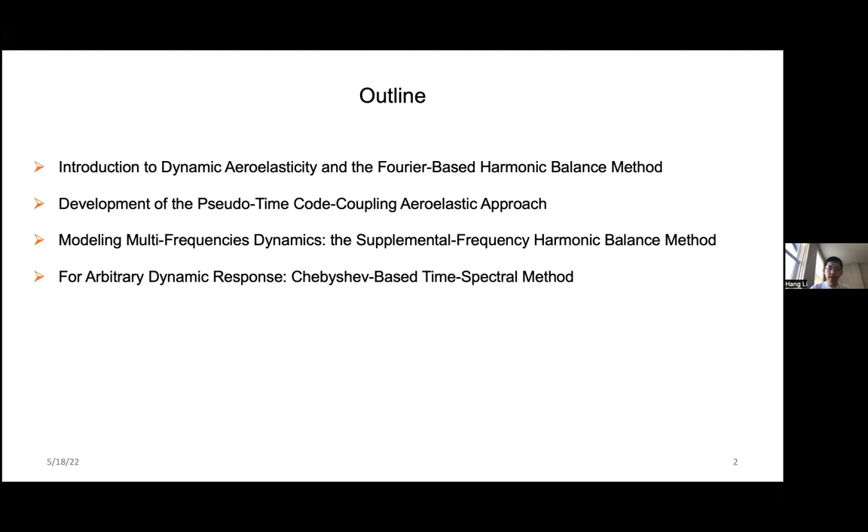So first, dynamic aeroelasticity. This is a multidisciplinary problem. It includes aerodynamic force, or in other fluid media we can call it just fluid forces, with structure elastic forces and inertial forces. This is the coupling of those three.

So for flutter, basically we have two basic phenomena. There are other phenomena, but these two are pretty common to this topic. One is called flutter. We usually define it as the onset point of self-excited vibration. So when we look at the figure here, there's a curve that defines the stability boundary. When we move from stable to unstable, at this boundary it starts vibrating, we call it the flutter point. Another term is limit cycle oscillation, LCO. Usually in literature it's defined as the vibration following the flutter point that has a finite amplitude. Usually these two terms are used interchangeably, but this is my preferred definition.

So from stability point B moving to C, the vibration has an obvious finite amplitude there, so we call it LCO. At the flutter boundary, we can model the system by linear methods, but for LCO, nonlinearities are important, and we need a better approach to model it.

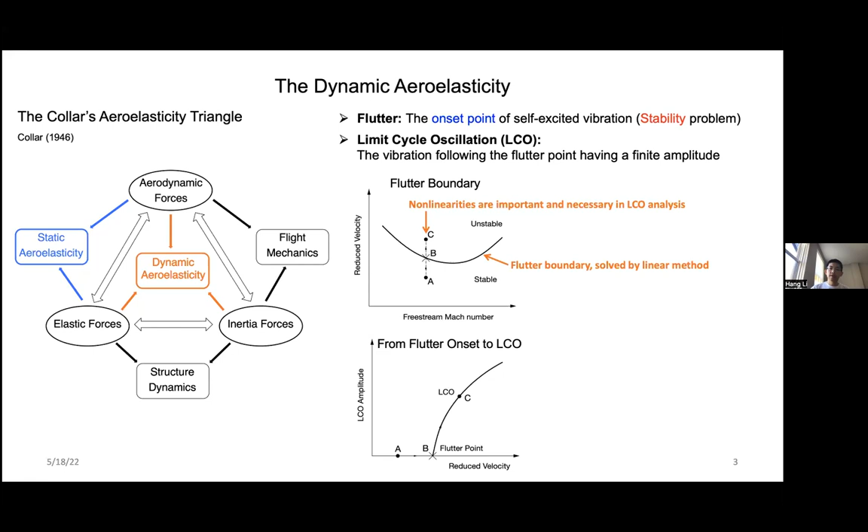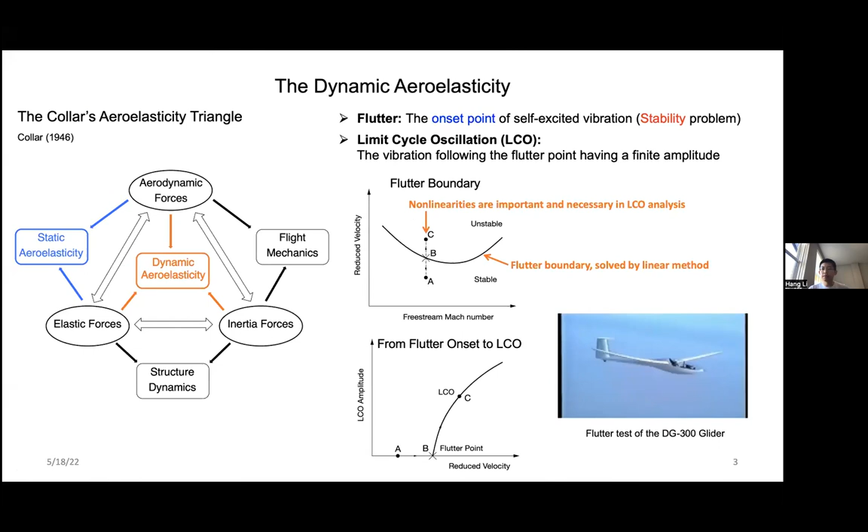Here's an example of the DG300 glider. This is a pretty popular video that shows the flutter onset. So it speeds up - I believe there's another airplane dragging it to speed up - and then after it slows down, the flutter stops.

Before I talk about my method, I want to discuss some traditional aeroelastic methods. Usually when I construct the problem into an aerodynamic part and a structure part, there are two equations. When we solve the two equations together, we find, for example, if we give an input, we find point A, or give another input, we may find point C here. So we gradually try different points, and finally we can bracket it and determine this flutter onset point. This method is based on trial and error, and we need multiple rounds of solving. For the fluid and structure parts, we need time synchronization, and a very small time step is required to resolve the problem.

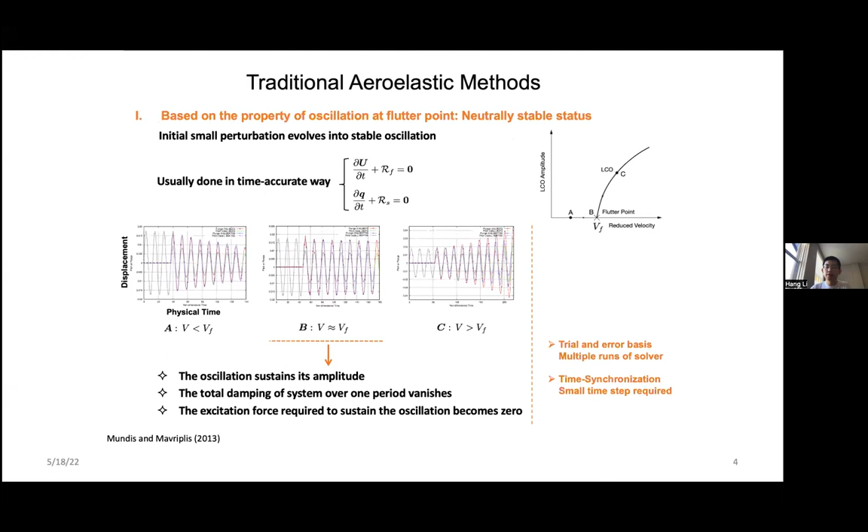Another traditional method is called the flutter determinant or eigenvalue method, treating it like an eigenvalue problem. So this is the structural equation converted into the frequency domain, and for the aerodynamic part, we convert it to another matrix vector multiplication, using this matrix we call the aerodynamic transfer matrix.

And then we need to determine this big matrix on the left-hand side, and the determinant must go to 0 for a valid solution of Q. That's how we can determine a flutter point.

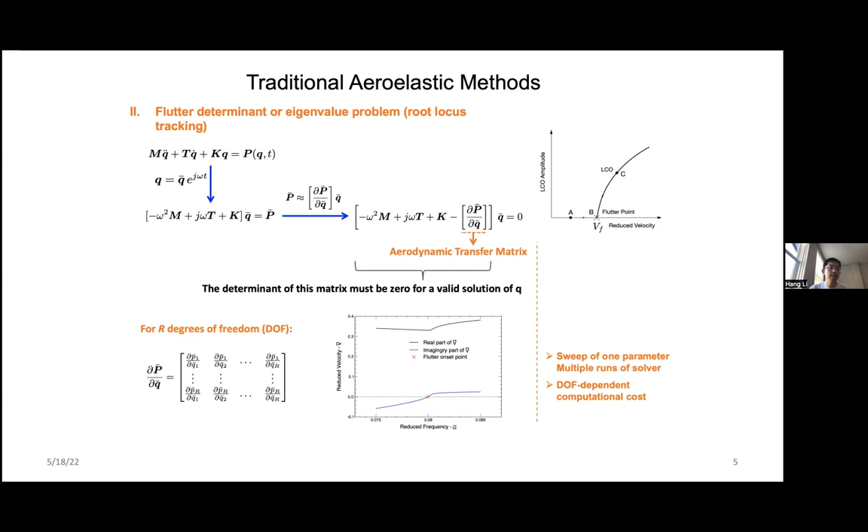Again, this method needs to sweep over one parameter, usually the frequencies, and we need multiple rounds of solver. This method really depends on the number of degrees of freedom. If we have more degrees of freedom, we need more rounds to solve the problem. The computational cost basically grows linearly with the number of degrees of freedom in your system.

So this leads to some questions about how we want to improve our approach, and this also leads to some points that we can improve towards the optimal aeroelastic method.

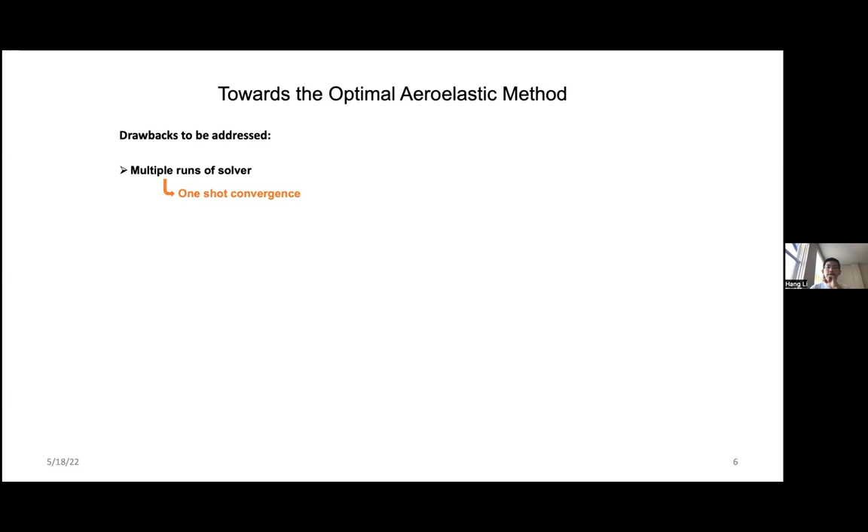First, the drawbacks to be addressed. First one is, if we don't need to run the solver multiple times, if we can solve the problem in one shot run to convergence, then we can save a lot of computational cost.

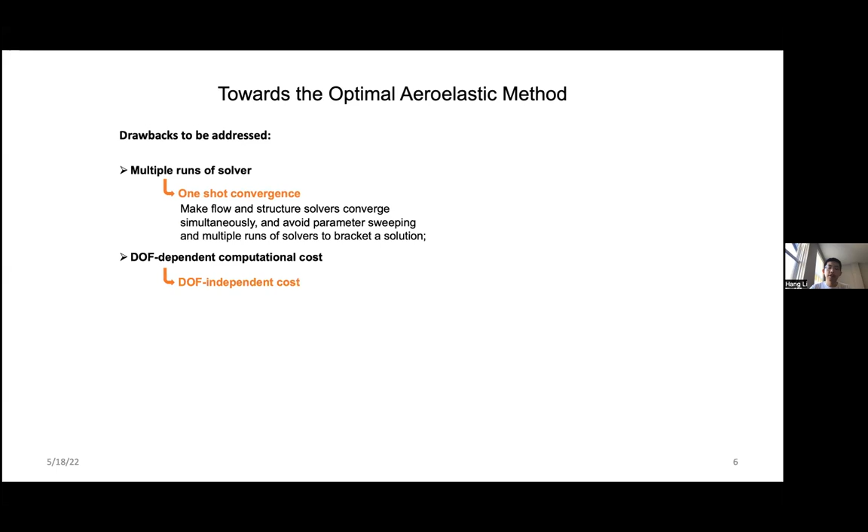And then if we can develop a method that is degree-of-freedom independent, then again it saves a lot of cost.

And then if we can desynchronize in physical time between the fluid and structure parts, we can have an optimal method for each field, and this could also potentially improve the efficiency a lot.

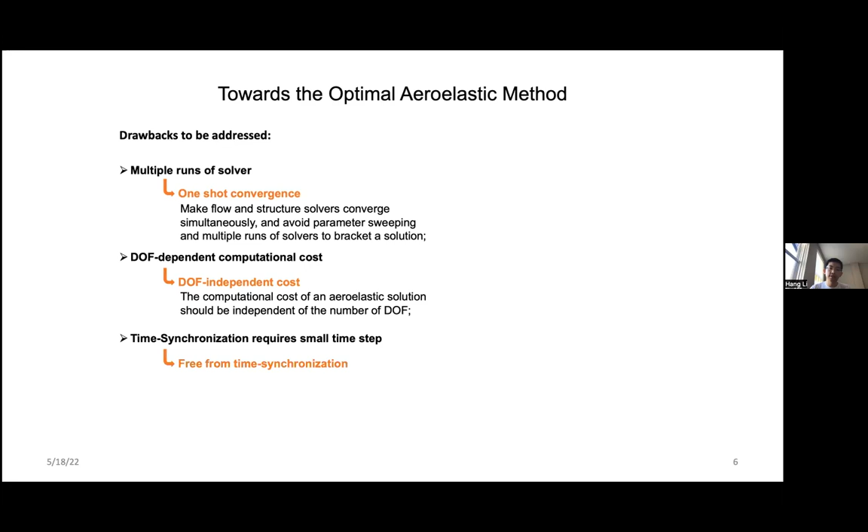Also, another point is that if we can solve the flutter and LCO (limit cycle oscillation) in one solver, it's going to be great.

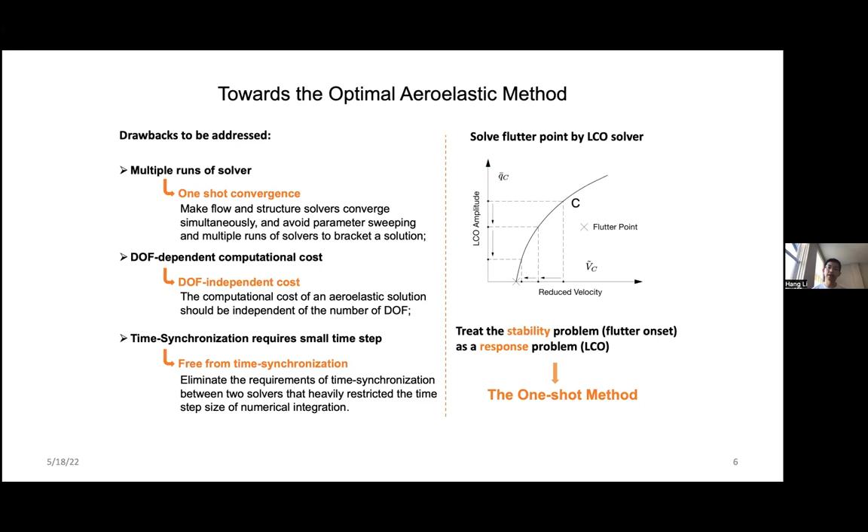In this way, I developed the one-shot method, based on a harmonic balance approach. So I will talk about how I can achieve all these goals.

The harmonic balance method is a Fourier-based mixed time-frequency domain method. So usually for a dynamic system we treat in our research, we frequently encounter periodic problems.

But when we do simulation of a periodic problem using a time-accurate method, we have to dampen out the initial transient. It could be long, and it could be costly.

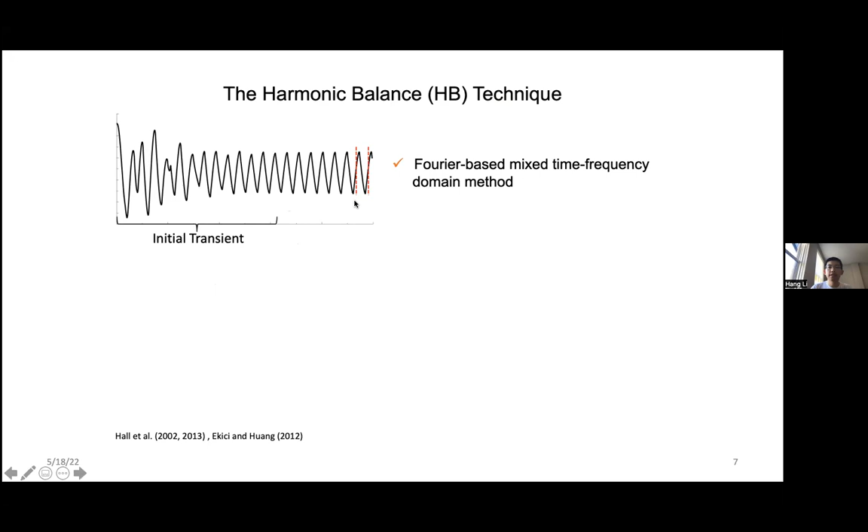So instead of going through all this transient and waiting for a periodic pattern to settle down, we can directly look at this periodic pattern. We don't actually go through time steps over the period; we just solve the solution at a finite handful of collocation points over a period, and finally resolve every point in between using Fourier interpolation. By doing this, we can save computational cost significantly.

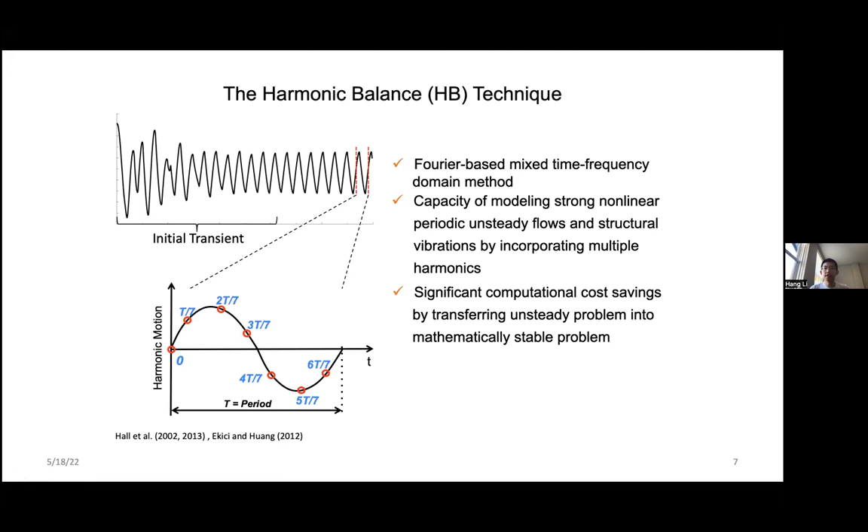This is inherently convenient for analyzing flutter and LCO problems, which are time periodic. This method can also easily model strongly nonlinear periodic problems by using more and more collocation points to resolve the pattern.

So this is an example applying the HBM technique to the aerodynamic equation. I'll take the RANS equation as the example. The uppercase U is the dependent variable vector, and we can convert it using discrete Fourier transformation into real and imaginary parts.

And we assume we need to retain the n number of harmonics. This leads to a transformation: U star is the collocation points over one period, and U hat means the Fourier coefficient. These two can be converted interchangeably using the Fourier inverse transformation and Fourier transformation.

And then we substitute this relationship into the governing equation. Finally, we get an equation at a number of subtime levels, and this time-derivative term, look at here.

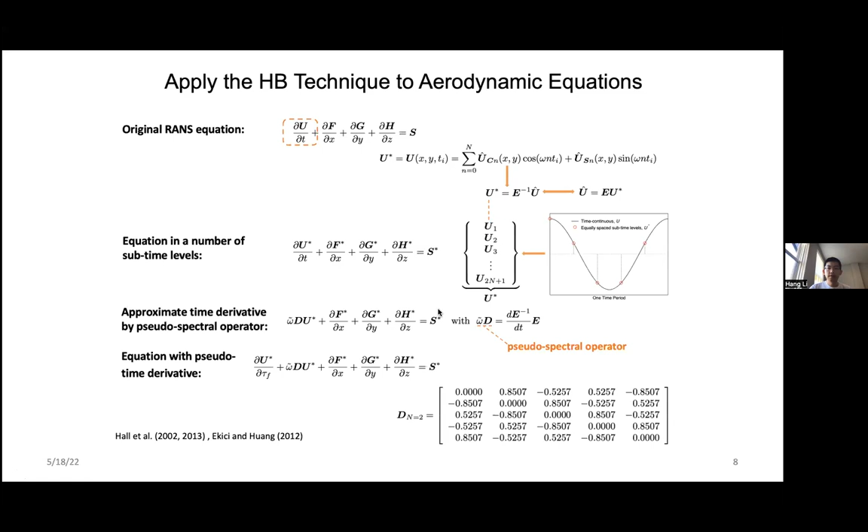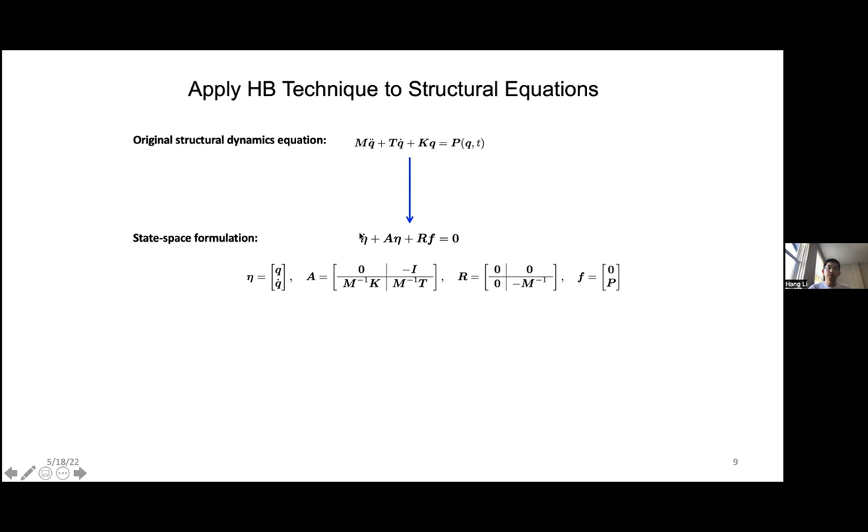Also, we can do the same thing for the structural equation. This is a general equation, and we convert it to state space formulation, doing the same thing: converting it into harmonic balance form with a pseudo-spectral operator, and then adding a pseudo-time derivative.

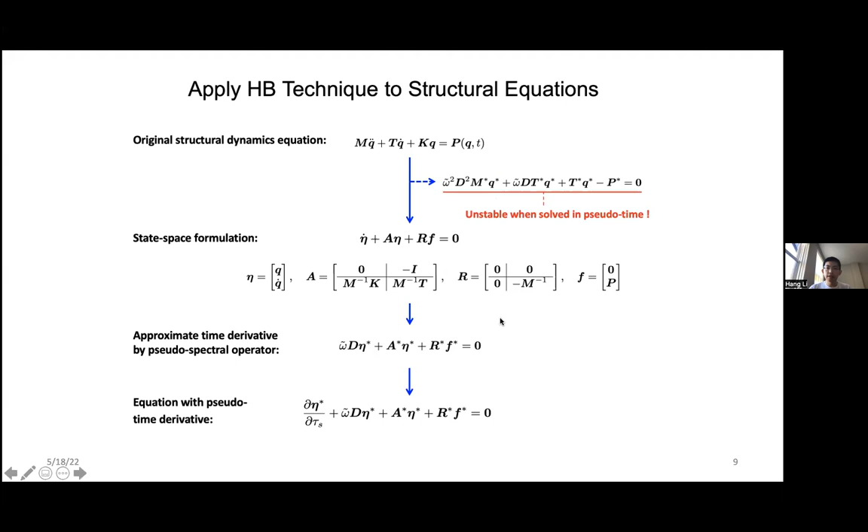One thing I want to mention is that we can actually go directly from the original second time-derivative equation into this form. We have a d-square omega-square term here, but this equation is not stable when solved in pseudo time. I have another method to stabilize this equation, but it's not in the main scope of this talk, so I will put a reference at the end. For now, we focus on this equation based on state space formulation.

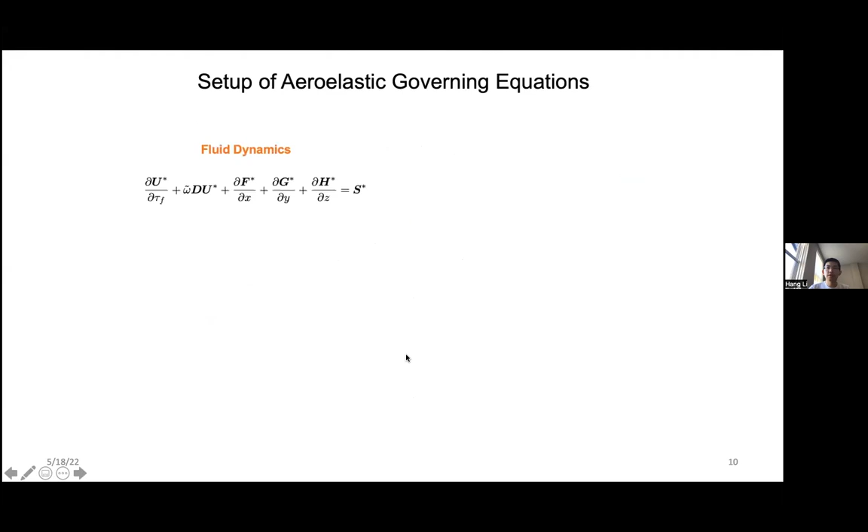So after this, we can set up an Aeroelastic governing equation. This is fluid dynamics, and this is structural dynamics. We rewrite it into a very brief form.

In fluid dynamics, for example, Mach number and Reynolds number are usually fixed parameters. In structure, the structure property matrix are fixed parameters too. So finally we can give a compact form like this, where everything inside these parentheses is a variable that needs to be solved for the aeroelastic problem.

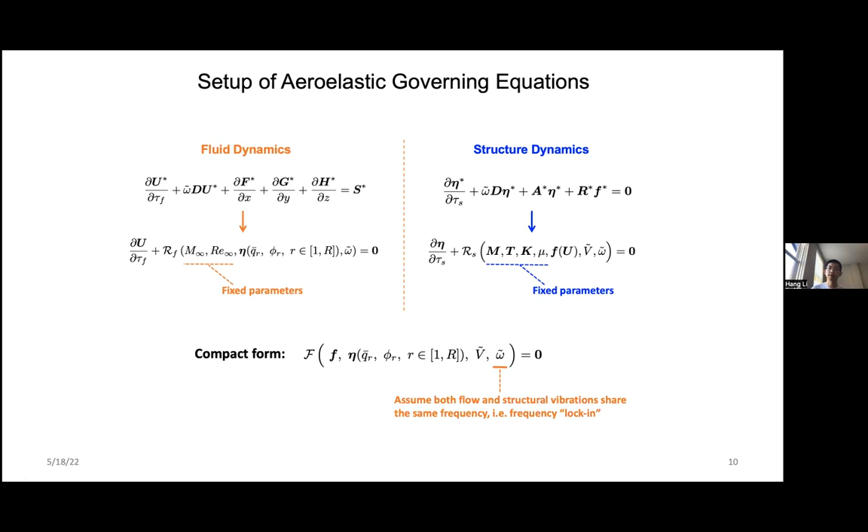In the current application, I assume that both flow and structural vibration share the same frequency. That means there's a frequency lock-in, so the frequency is for both fields.

Before I talk about my pseudo time code coupling approach, I want to talk about some other established HB/LCO methods. I think this was the first method of this type, developed back in 2002-2004 by Dr. Jeffrey Thomas from Duke. It treated the unknown vector and solved this equation by Newton iteration, the Newton-Raphson method.

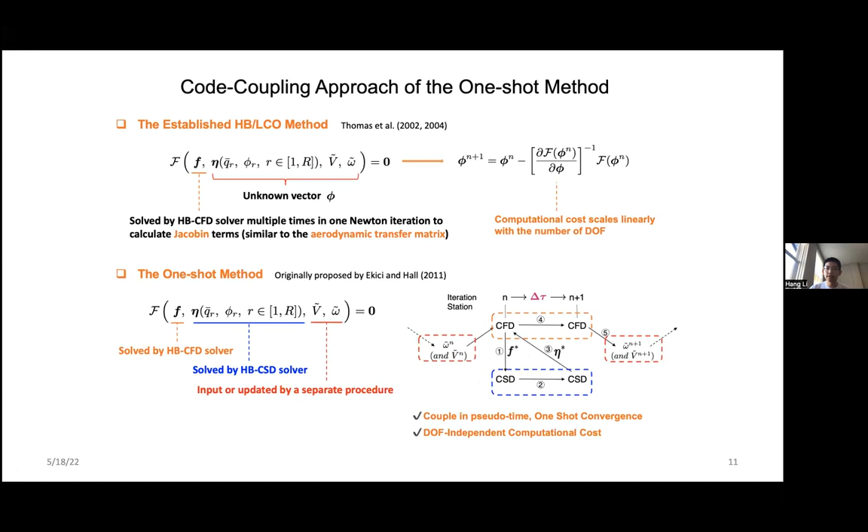I want to give a more detailed explanation of physical time and pseudo time, because this explains why our one-shot code coupling method is free from time synchronization issues. Traditionally, when using the time-accurate method, the physical time step is a very small step size to resolve the transient, and the pseudo time step is an inner iteration at every physical time instance to get that instance converged locally.

But in the harmonic-based method, because we solve the solution over a collection of collocation points, the physical time step effectively becomes the time interval between collocation points, which are evenly distributed over one period. So it becomes very large compared with the time-accurate method. And the pseudo time step, instead of being local, becomes a global aeroelastic iteration used for this purpose. So they are quite different.

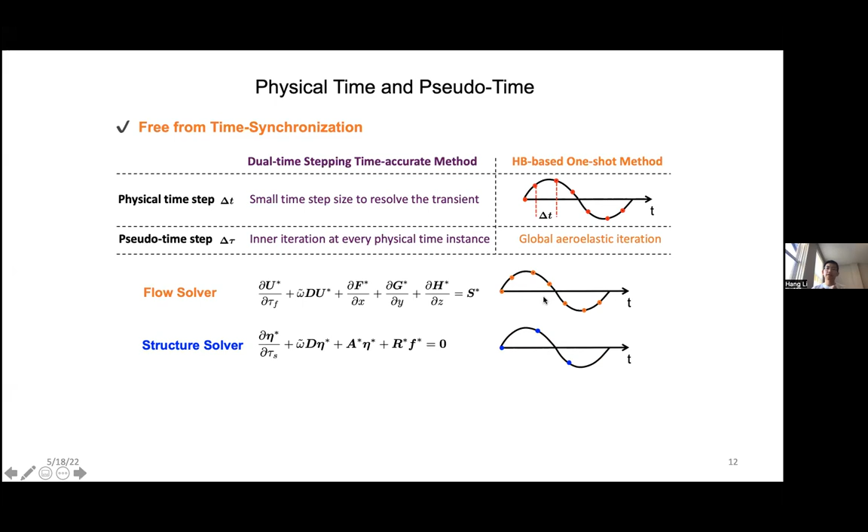For example, if we have a flow solver, we can solve the solution over a number of collocation points. For the structure solver, since it's usually more linear, we can use fewer collocation points, like this. Then at the interface, when we exchange data between these two fields, we can use Fourier interpolation to exchange data with negligible error.

That's why, by converting the physical time step to the time interval of collocation points, and using different numbers of collocation points according to different nonlinearity, we can let the solvers do code coupling without time synchronization. The two solvers can take different time steps as well as different time integration schemes to achieve the fastest convergence rate. So they are coupled, but from a numerical method point of view, they are also decoupled.

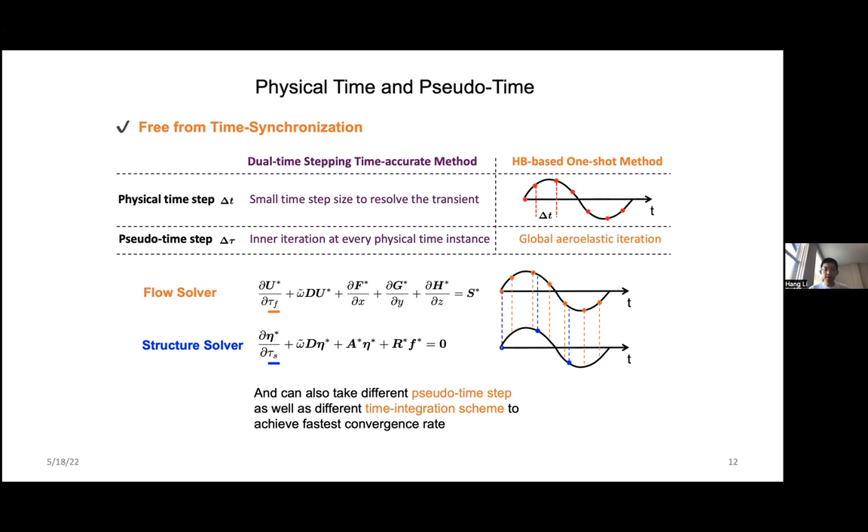So this is a beautiful thing about coupling in pseudo time.

Then there's something else about this code coupling approach, also a one-shot method. For any numerical method, we need to make sure it's well-posed, so there's a unique solution we can determine.

Unfortunately, dynamic aeroelasticity is usually an underdetermined problem because we have a CFD solver for CFD variables, we have a structure solver for structure variables, but we have two extra unknowns that have no constitutive equation. We need to prescribe these two parameters in the equation as inputs.

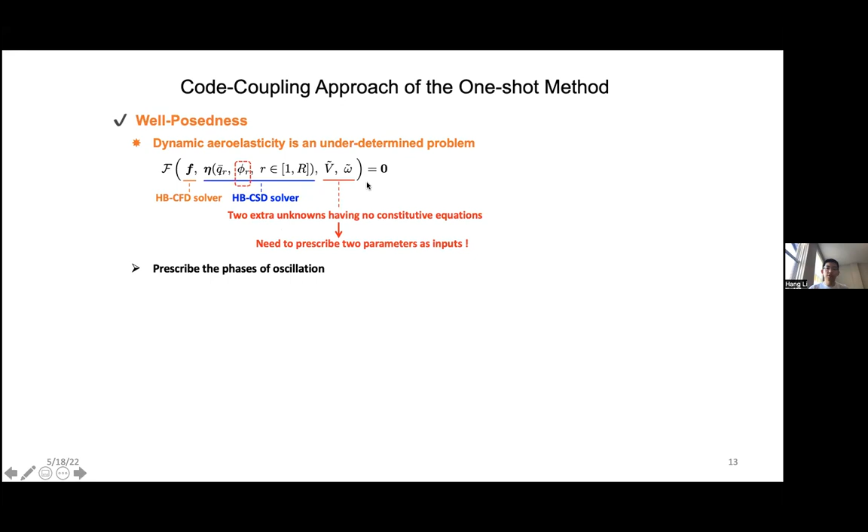So usually we prescribe the phase of oscillation here. This is an example, just a Rayleigh oscillator, a very simple example.

So if they don't fix phase, sometimes it's just a simultaneous shift. Every degree of freedom shifts simultaneously, and the solution does not converge.

Usually we only need to fix the phase of one degree of freedom and correct the rest to keep the phase difference updated by the numerical scheme unchanged. By doing this, we can eliminate the side effect.

Another parameter we need to prescribe, we need to consider something about this. One way we can do it is prescribe reduced velocity and update frequencies. This is a typical LCO branch. This is the solution we want to solve.

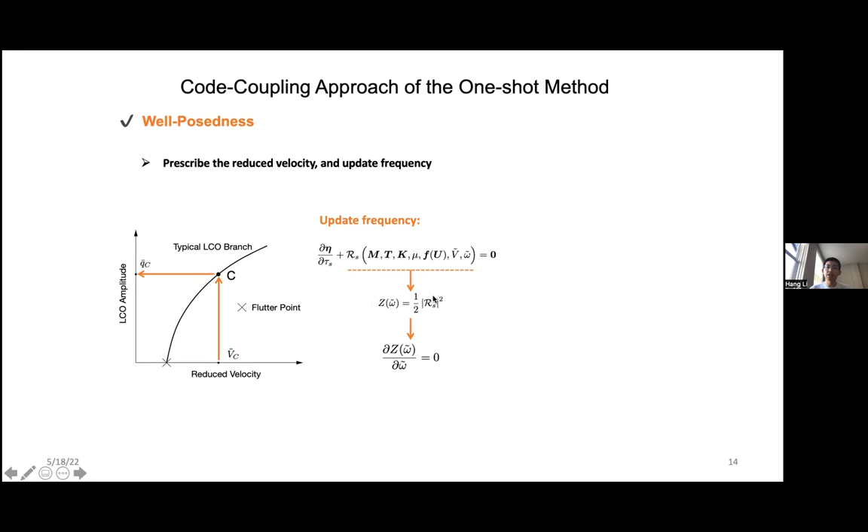So what we can do is from the structure equation, this is a residual, we can form another equation. We can take the residual as an objective function, and we want to find a frequency that makes the residual zero. This leads to another updated equation for frequencies.

This way actually works well, but there are some scenarios that make this method less efficient. For example, if the LCO is not subject to strong nonlinearity, but the nonlinearity is pretty weak, the curve is nearly a vertical line. So there's a very narrow band of velocity range. Sometimes we cannot find the input solution at first to make the solver converge.

Another scenario is when we encounter an explosive type LCO, and if we prescribe one value here, there are going to be two solutions. So the problem is not well posed anymore.

And another scenario: what about if we want, besides all these points on the curve, to solve this point, the onset point? It's hard to find this value at first.

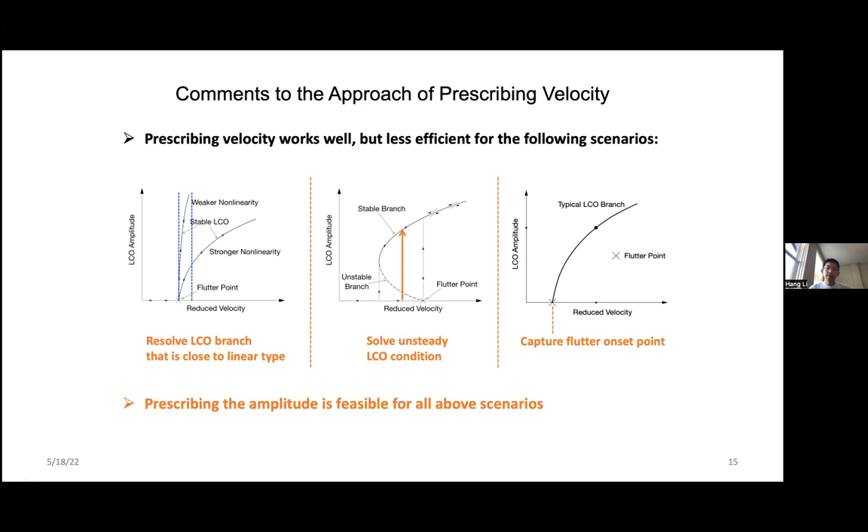So instead of prescribing a reduced velocity, we can actually prescribe amplitude of vibration and update the frequency and the velocity together.

By doing this, we actually start from this point, this is input, and then we find this point and frequency.

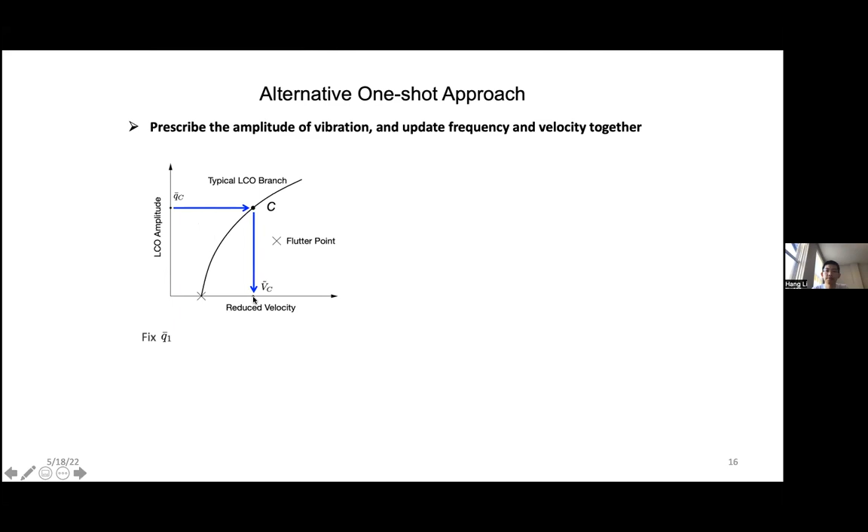Usually we fix one and correct the amplitude of the rest during iteration to keep the amplitude ratio updated by the numerical scheme unchanged, to eliminate the side effect.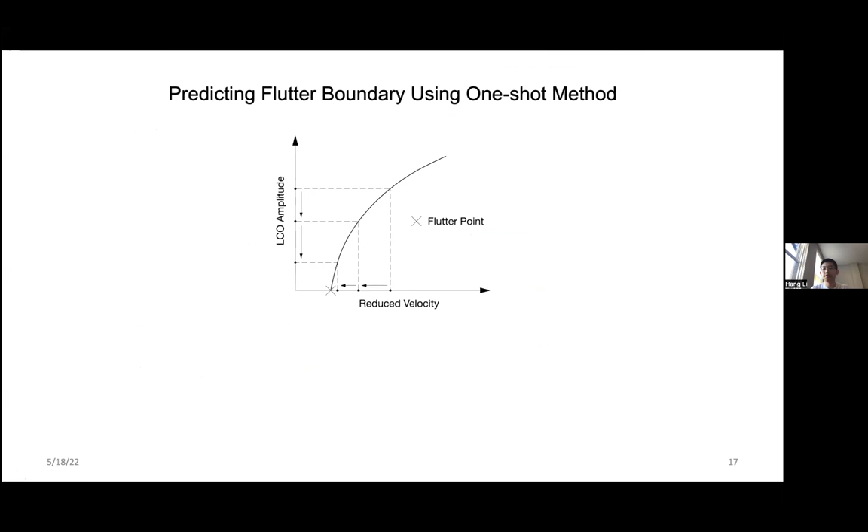And these two give us two higher polynomial equations that can be solved easily using a root finding method. So by prescribing amplitude, we can solve the flutter point in addition to the LCO point. We can see that if we put the amplitude smaller and smaller, the reduced velocity gets closer to the onset point.

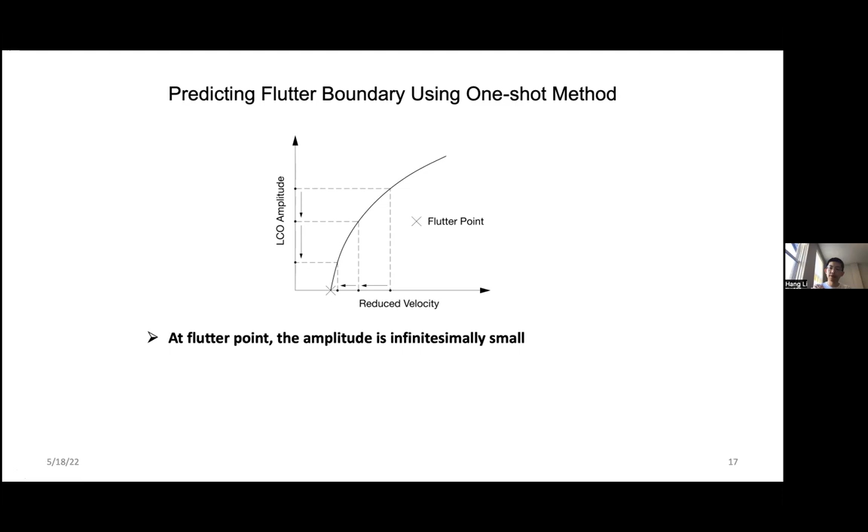So this is how we determine the flutter point in this way. At the flutter point, amplitude is infinitesimally small. This is the definition. The LCO condition of very small amplitude can be physically interpreted as a flutter point.

That's why we use the same solver, so we can treat the stability problem, which is flutter onset, as a response problem, which is LCO. So we solve both flutter and finite amplitude LCO using one solver, using one method.

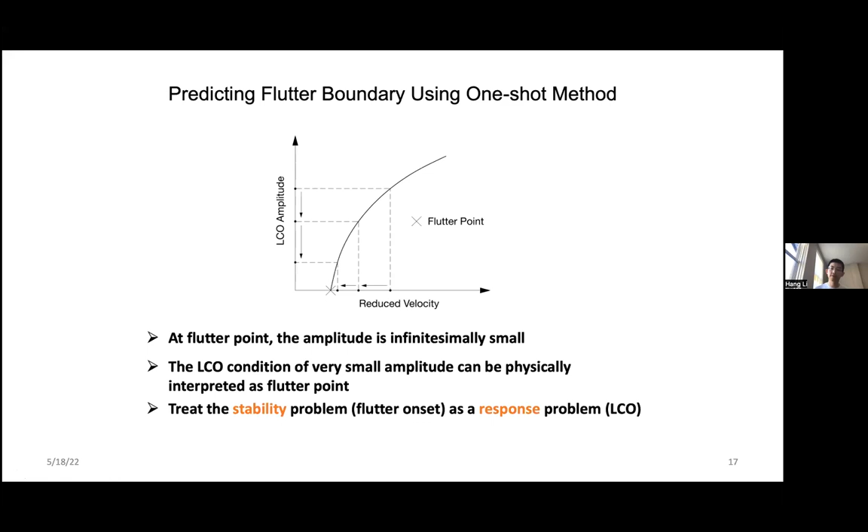So finally, this is the flowchart of the one-shot method. We have two branches. The left black one is prescribed velocity and update frequencies. The right one with blue flows is prescribed amplitude and update frequency and velocity together.

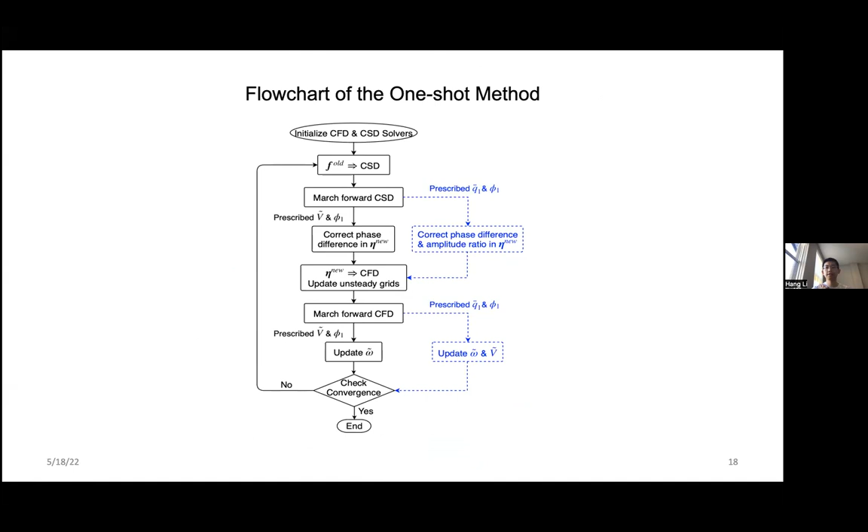Like any other numerical scheme, we need to make sure that the numerical scheme is stable enough to get a stable solution.

For a code coupling approach like aeroelasticity, fluid structure interaction, or any other applications, the point here is energy balance at the interface. The stability of the one-shot method can be assessed by suppression of the spurious energy generated at the interface.

The basic idea is usually over one iteration of coupling: when we march the flow solver forward, we update the aerodynamic force with fixed displacement, so zero work is done by the flow solver. However, when we march forward the structure solver, the displacement is updated with fixed aerodynamic force, so some work is done by the structure solver.

So the energy between these two fields, by the numerical method, is not balanced, and some spurious energy is generated. For stability, we need to make this spurious energy as small as possible.

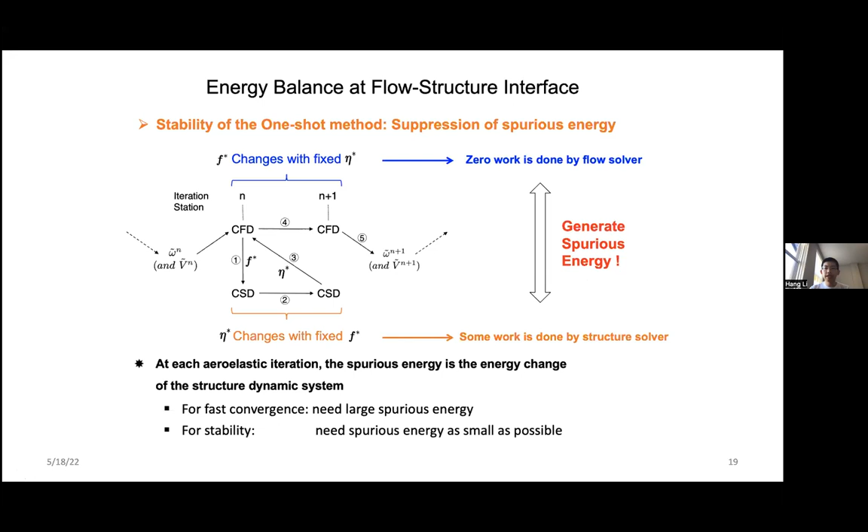So how do we do that? Traditionally, because there's non-zero energy from the structural part, if we want to balance it, we can make energy in the fluid part. That's why a lot of aeroelastic methods exist.

Instead of going directly from one structural deformation to another, they create a lot of sub-iterations. That means from updating the previous structure variable to the updated one, they create a lot of intermediate values, trying to make the latter fluid solver produce some energy here to balance it.

But the way the one-shot method works is different, because the fluid solver has zero energy input. The approach here is to try to make the energy produced by the structure solver very low, so that it's within the criteria of stability, and then the whole solver can be stabilized to give a stable solution. So the one-shot method goes directly from one previous updated structure variable to the next, trying to make the energy produced very low.

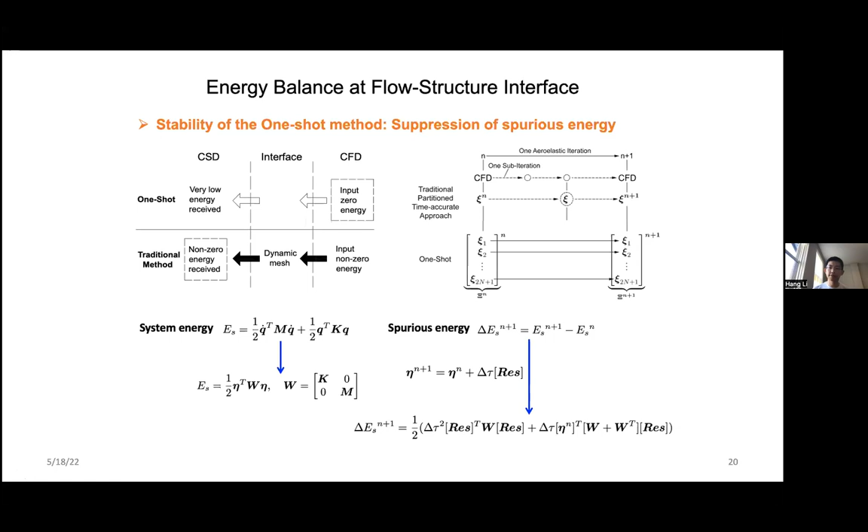For example, here is another example from my earlier paper. This is pseudo time step versus artificial energy produced, with different iteration numbers. We can see from 100 to 400 iterations, highlighted here, the artificial energy is actually reduced by an order of 4. So by doing this, the solver can be stabilized.

So this is how the one-shot method does the pseudo-time code coupling, and how it can produce all these advantages and stabilize the solver. The key is using the implicit time integration scheme for the structure solver.

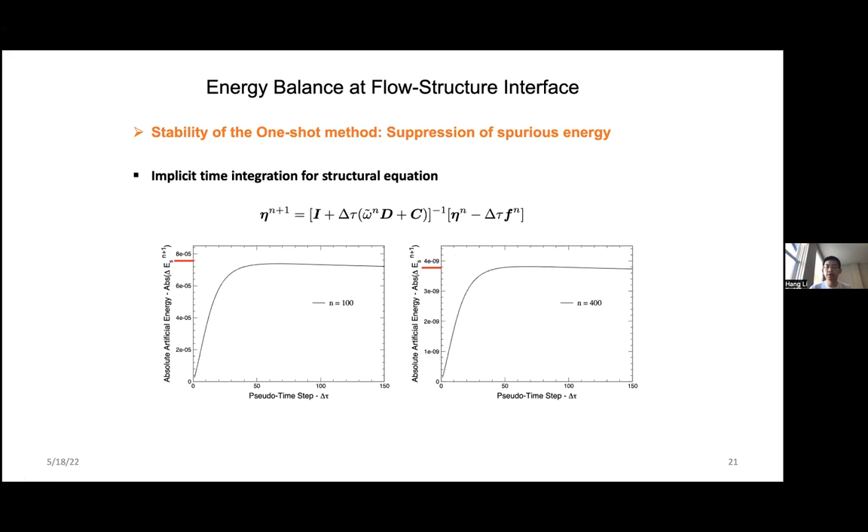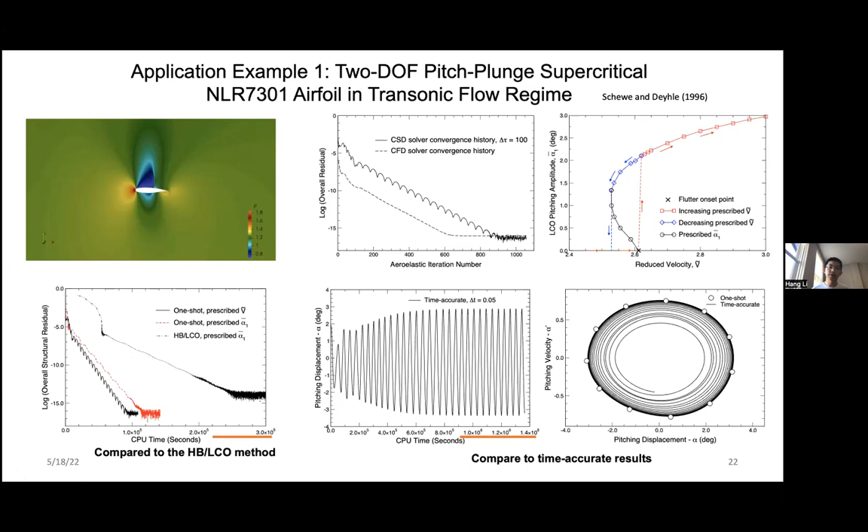Compared with the traditional HB-LCO method, the acceleration is obvious—much faster than the traditional method. And compared with the time-accurate method, you can see the CPU time here is a huge improvement in terms of computational cost, because we don't care about the transient. We just look into the periodic pattern directly.

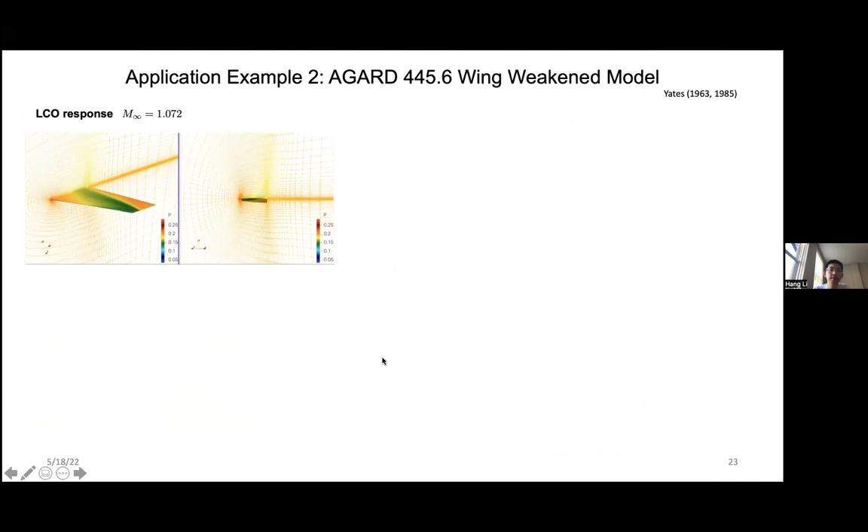Another benchmark problem is the AGARD 445.6 wing. This is the weakened model, and this example is at Mach number 1.072.

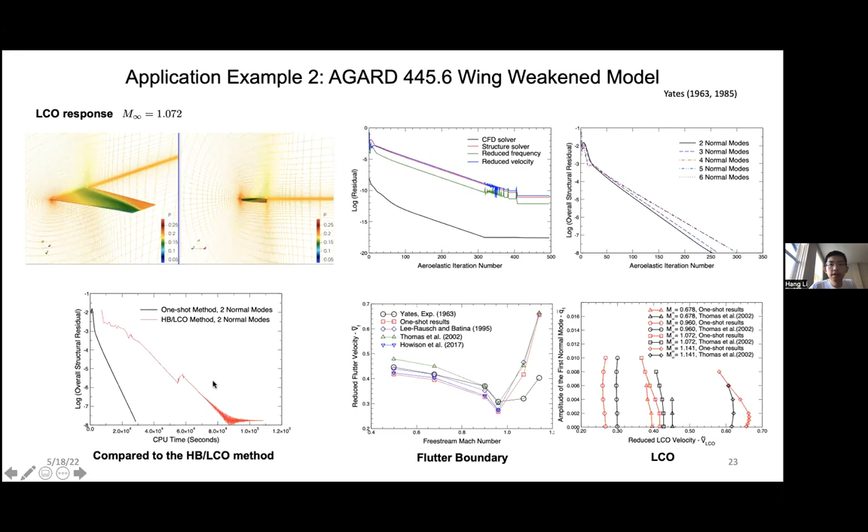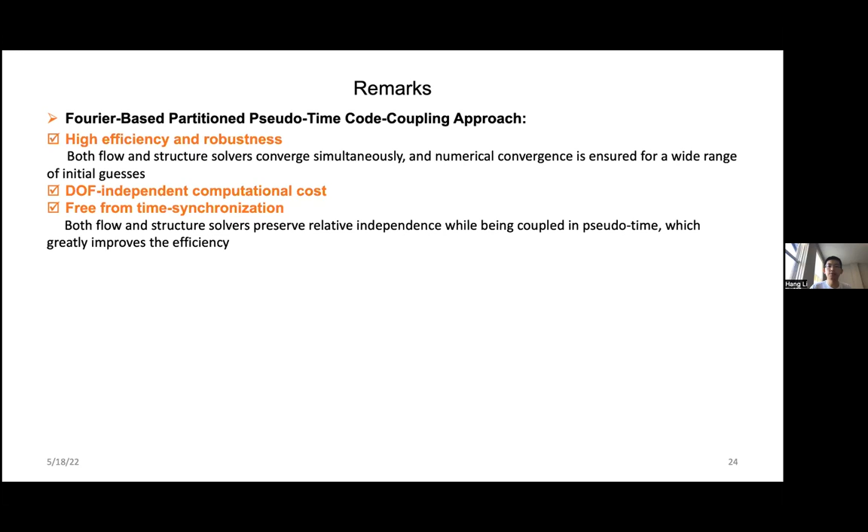So this is the one-shot method—basically a Fourier-based partitioned pseudo-time code coupling approach. It has high efficiency and robustness, and its computational cost is degree-of-freedom independent. It's also free from time synchronization between the two fields, structure and fluid, which makes it very flexible in the implementation of numerical schemes.

And it has flexible input—we can input either structure parameters or aerodynamic parameters—and finally solve the whole system. If the frequency is unknown, we have a frequency search procedure to determine it. We use an implicit structure solver to reduce the artificial energy at the interface to stabilize the solver.

It's pretty easy to implement because we can use off-the-shelf standalone CFD and structure solvers. We don't need dynamic mesh technique, and we don't need to calculate any Jacobian terms. So the whole process, from the numerical method point of view, is easy to implement.

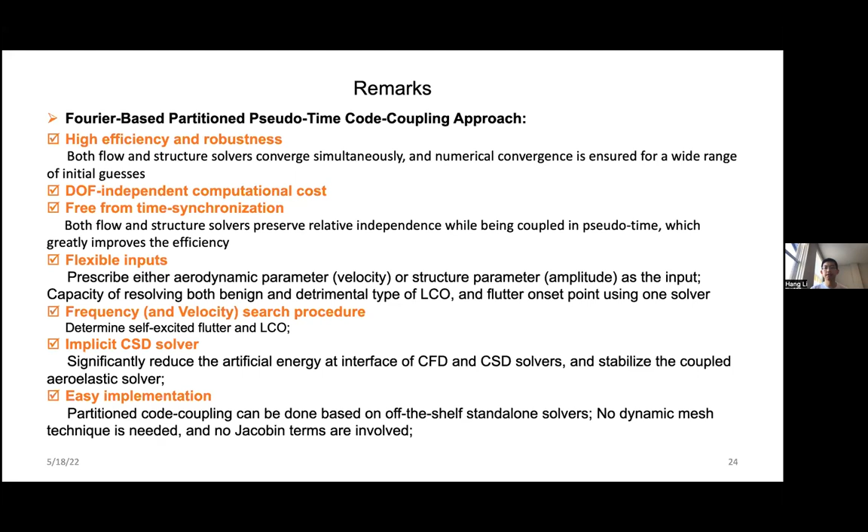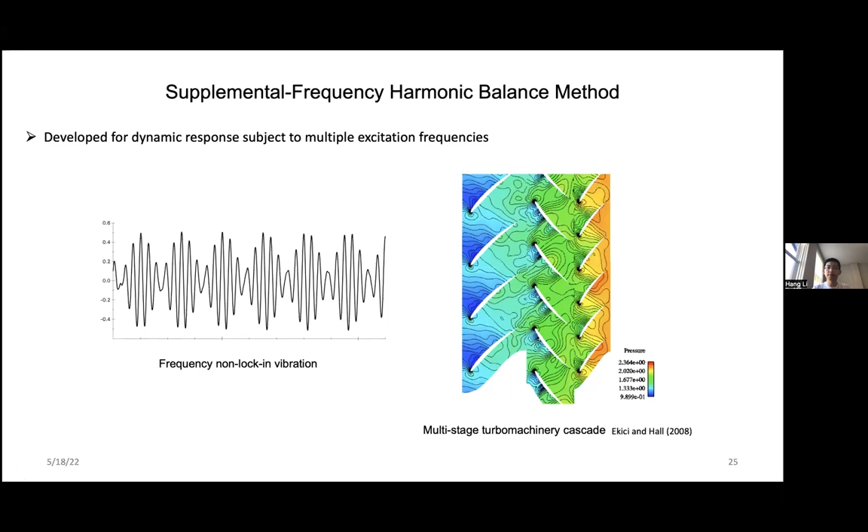There are some papers in the field dealing with similar problems, but I'd like to talk about my method because I think my method is much better. Let me put this together.

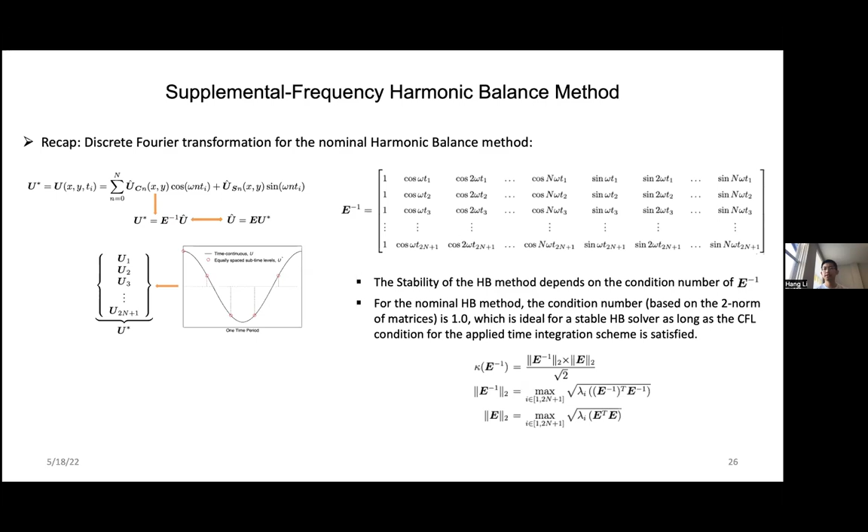There's another method to tackle condition number, but this is what I'm referencing here. The condition number is 1.0, which is ideal for a stable harmonic balance solver, as long as the CFL condition for the applied time integration scheme is satisfied. So this is good, the traditional one. Think about that.

For a general set of frequencies and time instants - for example, an arbitrary set of frequencies where the time instants are not evenly distributed - we have a general form of the transformation matrix.

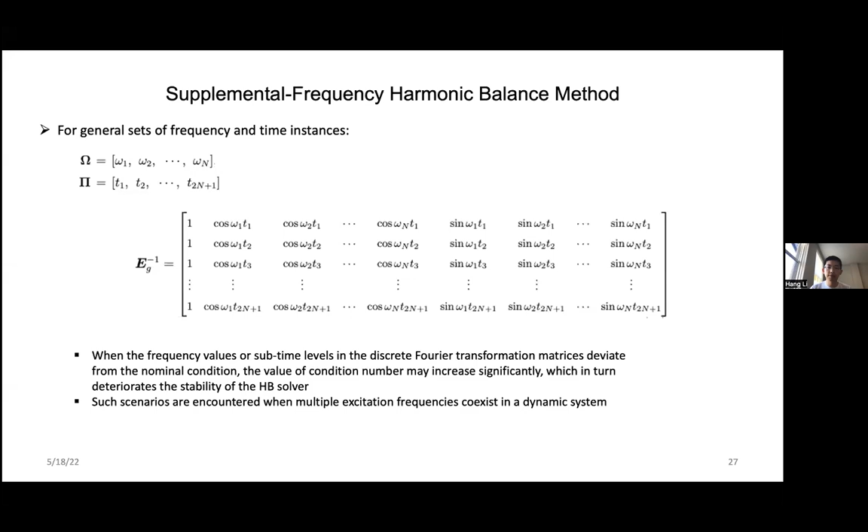Usually, when the frequency values or time levels in this discrete Fourier transformation matrix deviate from the nominal condition - that is, frequencies forming a harmonic set and time series evenly distributed over one period - if things change from this situation, the condition number may increase significantly and deteriorate the stability of the harmonic balance solver.

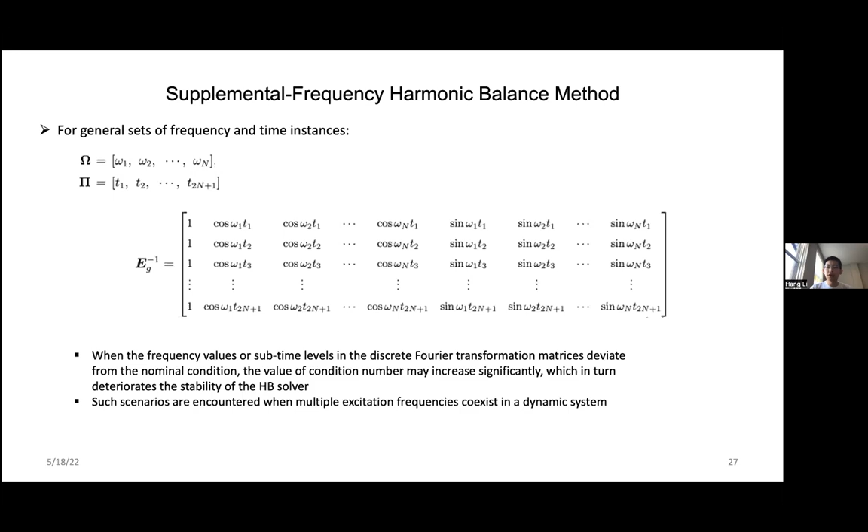Such a scenario can be encountered when multiple external frequencies coexist in a dynamic system, as we just talked about. A very typical application is turbo machinery, where people try to model how to deal with different frequency inputs. But here, let me take a simple example.

Let's look at a pitching NACA 64A010 airfoil subject to excitation of 2 frequencies in the inviscid transonic flow region. The Mach number here is 0.796. This case is taken from a previous aeroelastic case. I assume the angle of attack varies in time according to this equation, so there are 2 frequencies: omega A and omega B. For this case, I set omega B to be 2.6, a non-dimensional value.

I try to calculate the condition number of that Fourier matrix if I only formulate it using these two frequencies - let's see what happens. If I fix omega B to 2.6 and change the value of omega A around 1.0, we see that even a small change can cause the condition number to change dramatically.

For example, if omega A is 1.0, the condition number is 4.4. That's not a large value, looks not large, but on the right-hand side this is my residual history using different CFL numbers. If I use a very small CFL number, 0.01, for my CFD implementation, it still does not converge.

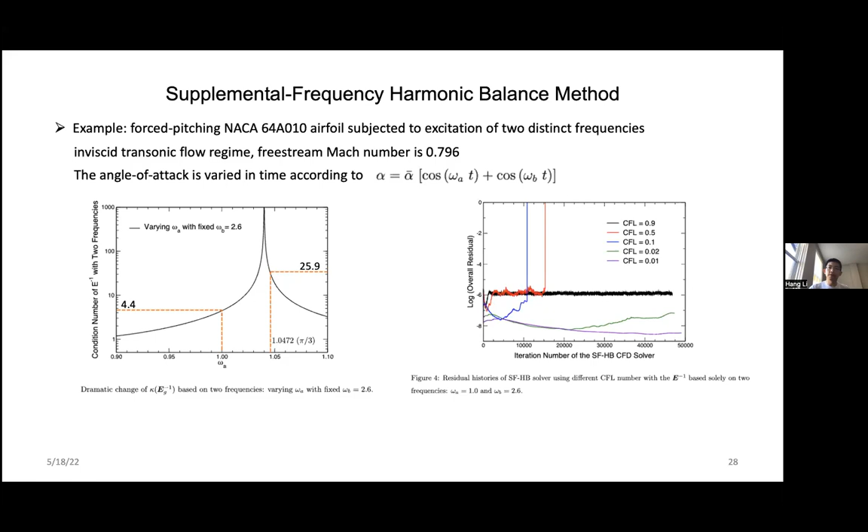So my approach is, I call it supplemental frequency. I have 2 input frequencies, and I want to find a supplemental frequency to construct a nearly harmonic frequency set including these 2 input frequencies.

The idea is, if I can find a base frequency and expand it in harmonic series, and this series happens to have one frequency close to omega A and another close to omega B, then I can replace these 2 frequencies with omega A and omega B, the 2 input frequencies. Finally, I can have a nearly harmonic frequency array.

Although it's not a perfect harmonic series, it's a nearly harmonic series. It still can actually make sure the condition number is small enough to ensure stability.

The base frequency can be determined by sideband theory or using the frequency ratio scaling approach. Because I want to save time here, I won't talk about detail on this. I will introduce my paper later on.

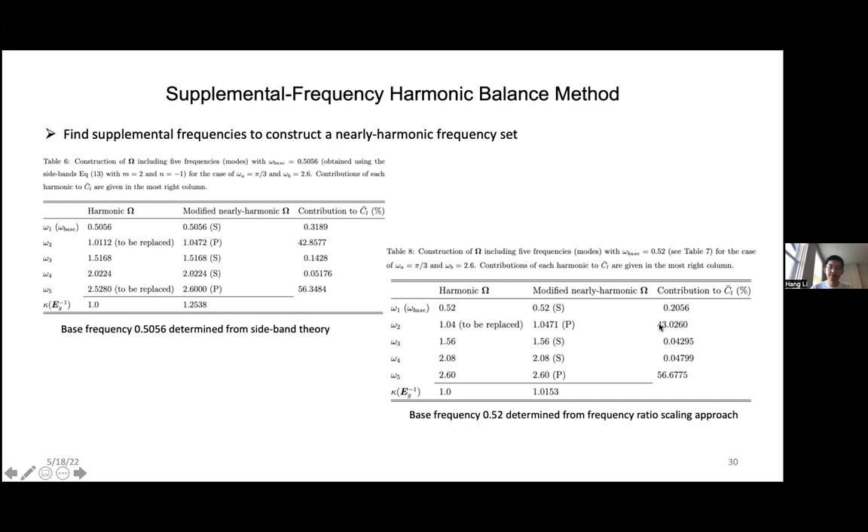This is the result. First, I tried different numbers of frequency modes. They converged pretty well as an academic example.

And because the time period here depends on the base frequencies, the beautiful thing here for the harmonic balance method is we don't need to start from 0 usually.

We can start from any time. We can start from 10, 20, or for here, I start from 50, and try to solve this time period. We can see we can resolve this time accurately, resolve the time response, and it matches the time-accurate solution very well.

Another beautiful thing for this method is that because right now I only resolve this one small period, for other periods, I don't need to rerun the solver. I can recover the value at any time instance over the entire time history by doing Fourier interpolation. I can recover every solution here just from these few collocation points.

That means for arbitrary cases, because for this example the two frequencies have an irrational ratio, this is arbitrary vibration. But even for this kind of time dynamics, I can first run a solver solving these few collocation points, and then recover every solution over the entire time history by doing Fourier interpolation.

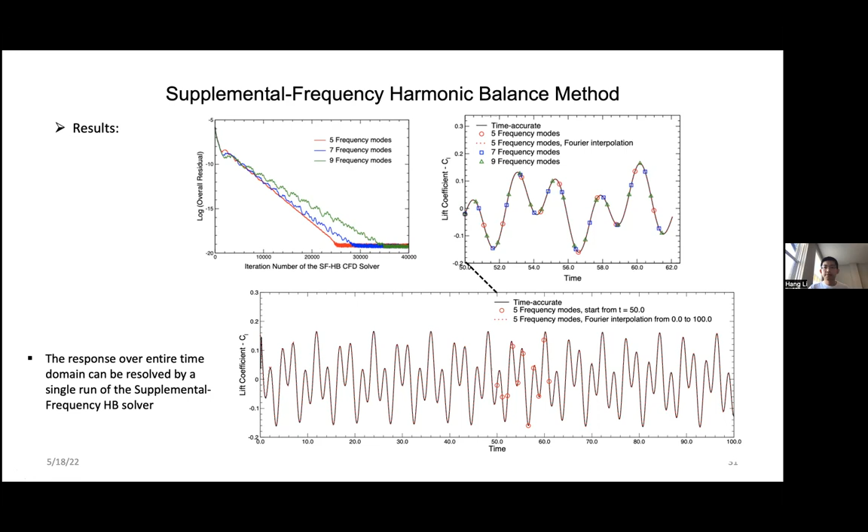It's also very easy to implement for this purpose. So this period here is only for this part.

Finally, another thing is, how about if we want to deal with dynamic frequencies, a dynamic response, where we don't know the frequency and don't know how many frequencies there are, and we don't know how to update it. So this is arbitrary for dynamic response.

One solution is that instead of using Fourier series, we can use the Chebyshev series. We can construct a Chebyshev series based time spectral method. It's very similar to a Fourier based one.

For example, for the i-th collocation point, the truncated Fourier series is like this. And similarly, the Chebyshev expansion is like this. So they are very, very similar.

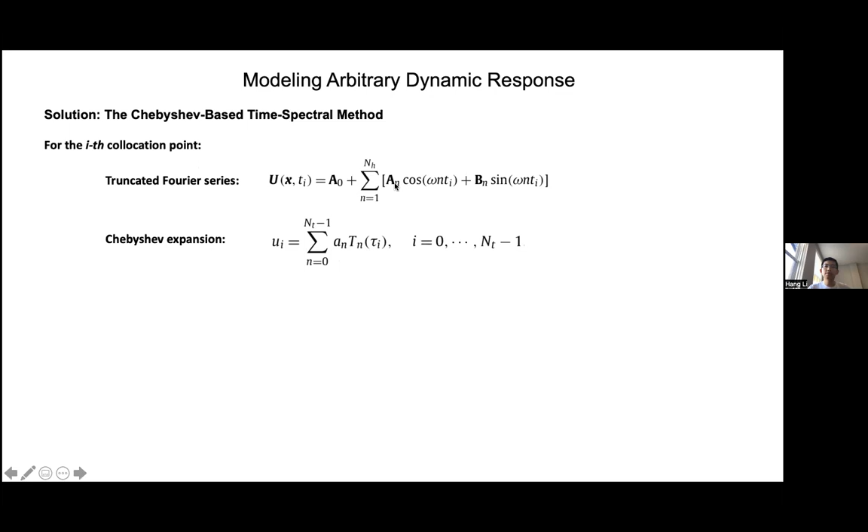Both actually convert the solution into different collocation points. For the Fourier series, there's a Fourier coefficient. And for the Chebyshev expansion, there's a coefficient there as well. It includes, there's a coefficient here, and this is the Chebyshev polynomial of the first kind.

And the tau I here is a standard collocation point. It's not uniformly distributed. It's just like dense, sparse, and then dense again over the period we investigated.

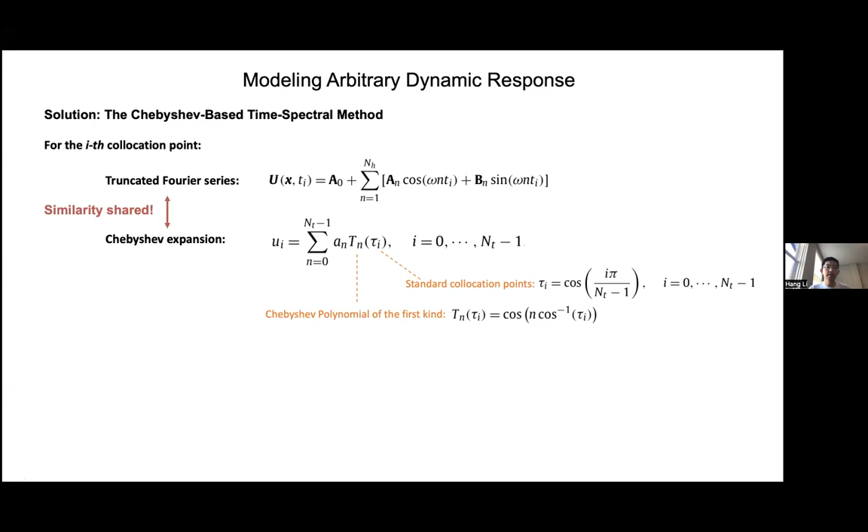Just talking about the oscillation, rotational oscillation of a cylinder. We look at the laminar flow, the vortex shedding behind it. So instead of a time accurate solution, we use very large steps to go through everything.

And they also produce a lot of computational savings compared to the time accurate method.

This method, this work I did during my PhD program, but I think it can also potentially be used for the code coupling approach and any other dynamic response problem.

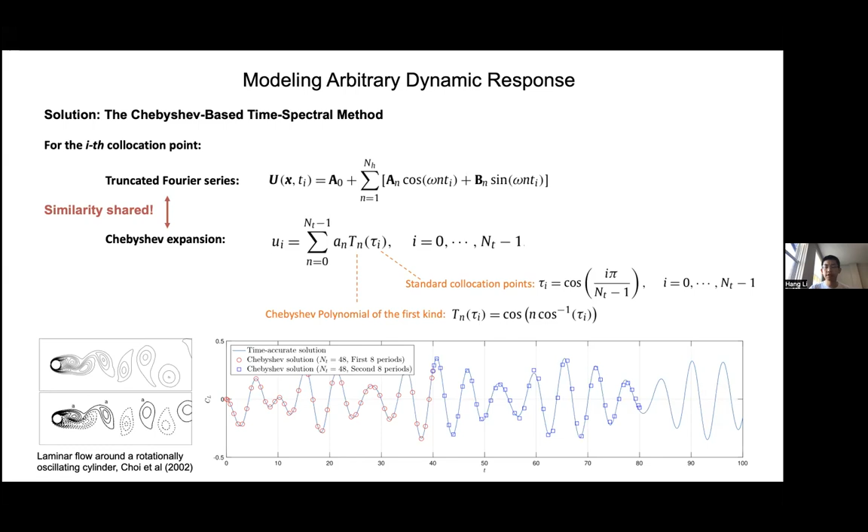Oh, so these are some references. Yeah, I'm sorry, I should actually include more references about the harmonic balance application to bio-inspired problems. I know there are two papers, but not many. So all this work I present here is based on my previous work.

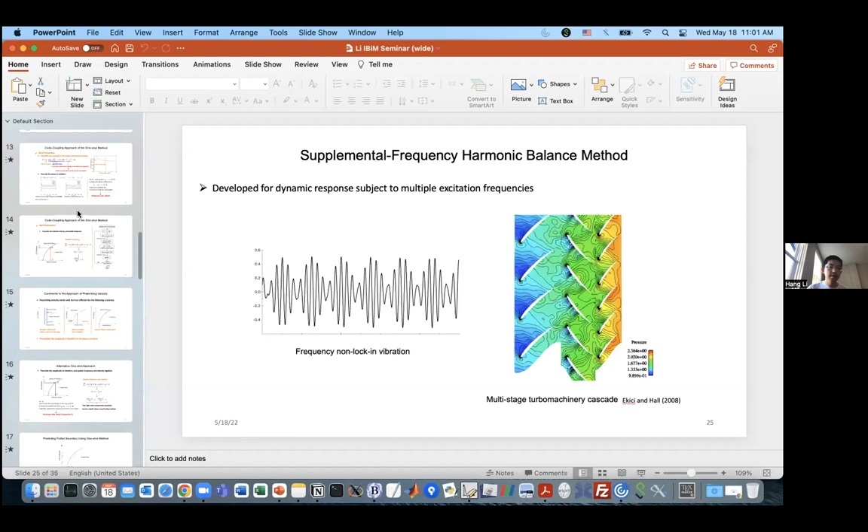I think it's right here, right? Let me just redo this.

The frequency is very important. This result is very interesting. Although for our numeric method we may use a different mesh or different time integration scheme, the frequency can shift a little, but for this specific numeric problem, we need it to be accurate.

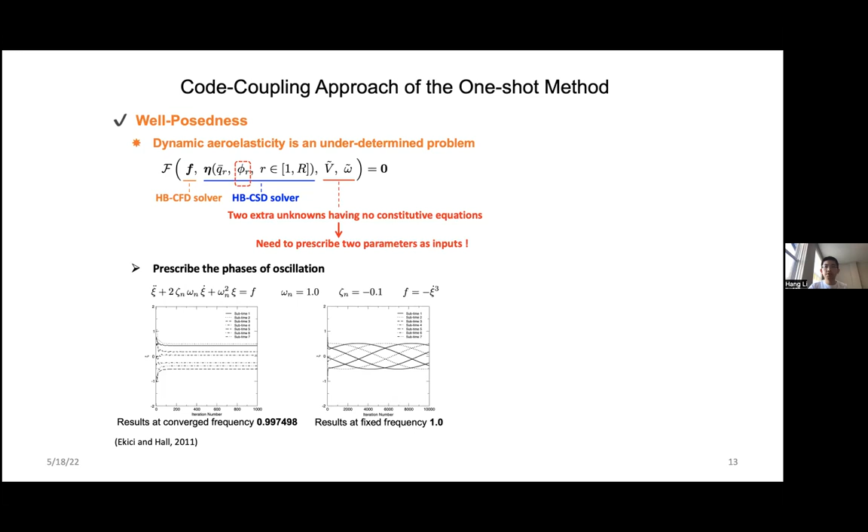Oh yeah, I think that's similar to what Sachin actually raised. How about dealing with multiple frequencies? Actually, if I use the one-shot method, let me show you. Just let me stop sharing very quick and reshare. There's another example here, I didn't put it in this slide, but there's another one. Let me just take 1 second please.

So usually, if there's a vibration with two frequencies, if it keeps multiple frequencies there all the time, the harmonic balance method will not resolve it because it deals with only one frequency. That's why I try to develop other methods to deal with multiple frequencies and arbitrary dynamic response. But for some systems, initially it has two frequencies, but gradually it becomes one, and if I use the harmonic balance method, it just solves the final steady state and does not take care of the transient. Let me show you real quick.

Am I missing something here? But I don't think you're sharing your screen anymore, I'm not seeing your slides. Oh yeah, Si-Chung, how about you? Yeah, so I don't share it right now, I try to find something else, I just wanted Hang Li to know that.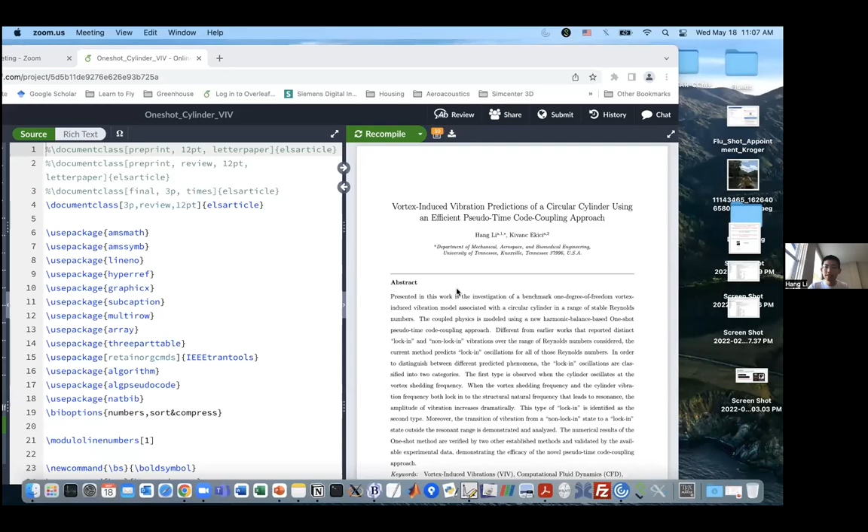Sorry, just 1 second. But while you prepare your slide, Hang Li, I forgot, I wanted to start by congratulating you on a very interesting presentation, and I really appreciate it. Oh yeah, nice, thank you very much, I appreciate your kind words. So this is something not published, because the case is too similar here, but let me show you something.

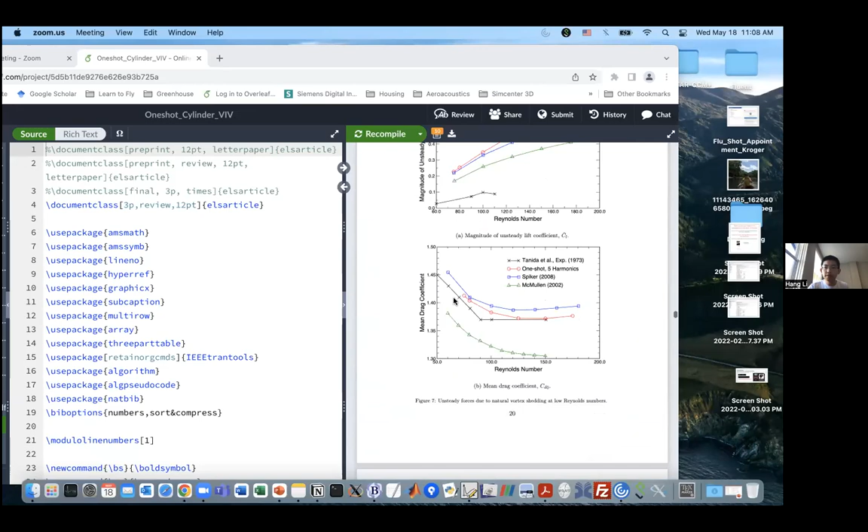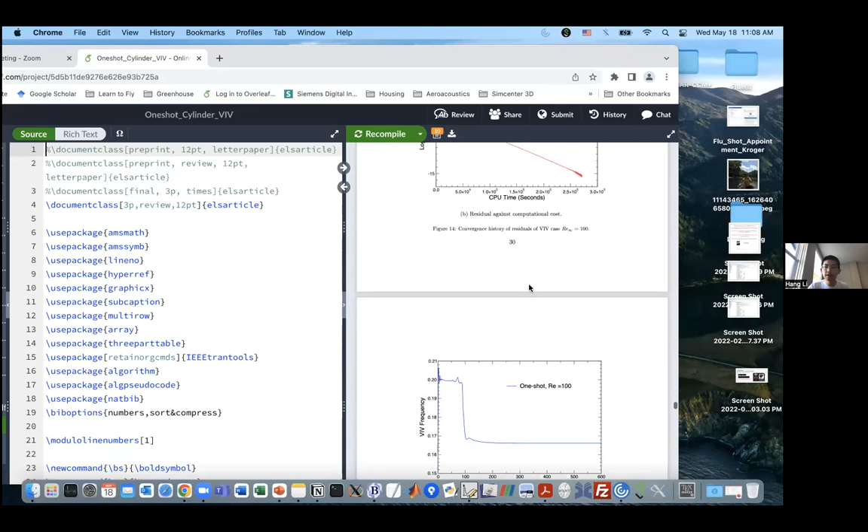I tried this on the vortex-induced vibration because there's a non-lock-in case over there. So for that, here's the example of a non-lock-in case.

Usually at first the vibration looks like this, and experimental papers also show this kind of result. If we don't look at it for a long period of time, it's just like this. But when we let it run as a time-accurate solution, gradually one frequency will dampen out and another frequency remains. It goes from non-lock-in to lock-in, and when we look at the FFT, one frequency just stands there.

The energy is not lost; the other frequency just gradually damps out. If I use the one-shot method to solve this, I can only resolve the final steady state. I cannot capture the initial state with multiple frequencies, because the method itself deals with only one frequency.

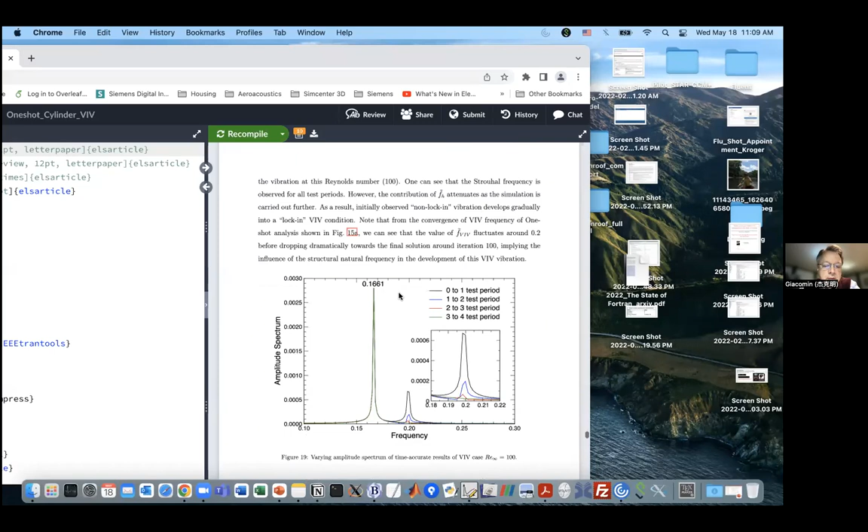So that's why I get it. If you slide back to figure 19, the spectrum there—I think we can agree the first peak is frequency matched, and it captured the physics perfectly. But it's not possible to frequency match all the peaks, because that second peak, which you expanded as an inset, is not a multiple of the first peak.

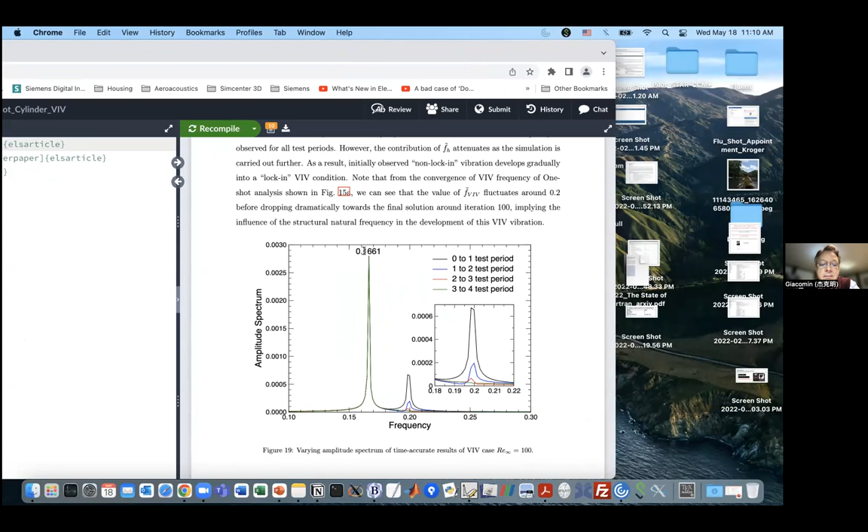Yes, so you've done a very good job capturing the first peak, but it won't match perfectly—I get it. This is the perfect example, this is what I needed to see.

I haven't included that because I need to limit the length of the slides. I'm sorry about that. So I didn't include this case here because all I showed in my slides are aeroelastic cases.

They are frequency locking, and I have another research project about vortex-induced vibration of a cylinder where there are a lot of frequency non-locking cases. If I want to talk about that case it takes a long time, but I think I can explain this one.

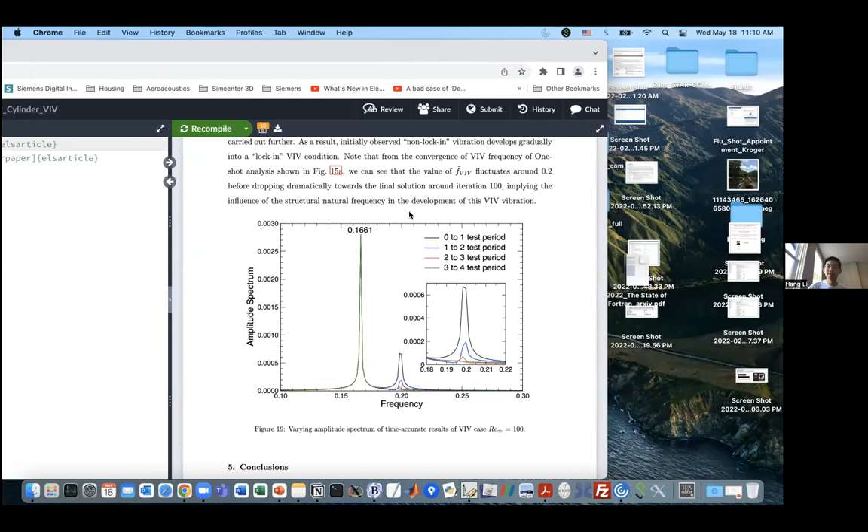Because this method only deals with one frequency, it can only resolve the final steady state. So that's why I tried to solve this other case with the supplemental frequency harmonic balance method I developed.

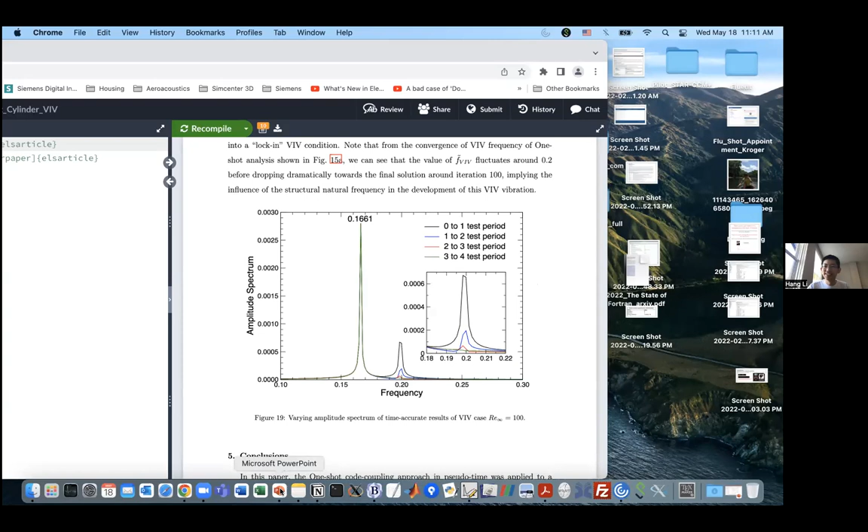Zhang Wei asked this question: how do you solve the fluid system for different collocation points? Are they coupled or solved iteratively? Let me see—how do you solve the fluid system?

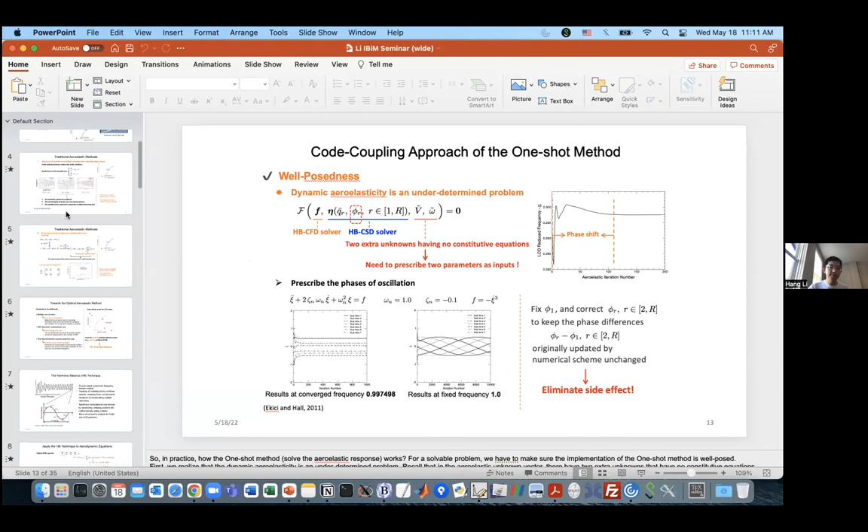So I guess they're coupled. Oh yeah, I got you, I got what you mean. So they are coupled—let me show you the equation here.

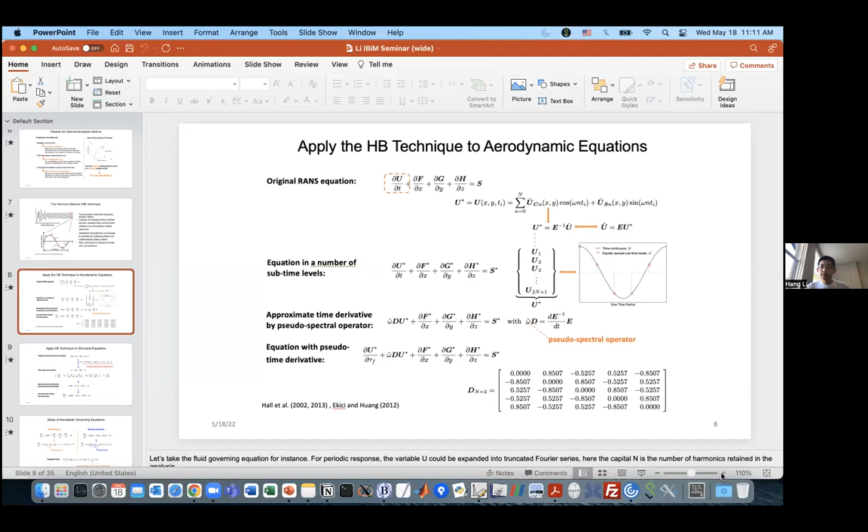By converting the original equation into this harmonic balance form, I solve the solution over these collocation points, and each point is coupled together by this pseudo-spectral operator. You see this D matrix here—it's not a diagonal matrix. So each collocation point, through this term, is coupled together.

It's still coupled. Right, if it were uncoupled it would be much easier—every steady solver could very easily be converted to an unsteady solver. But unfortunately, by nature, it's coupled by this D matrix.

Next question, Johnson from NPU asks: some of the fundamental frequencies are approximated in this approach, so how much influence will that have on the accuracy of the solution?

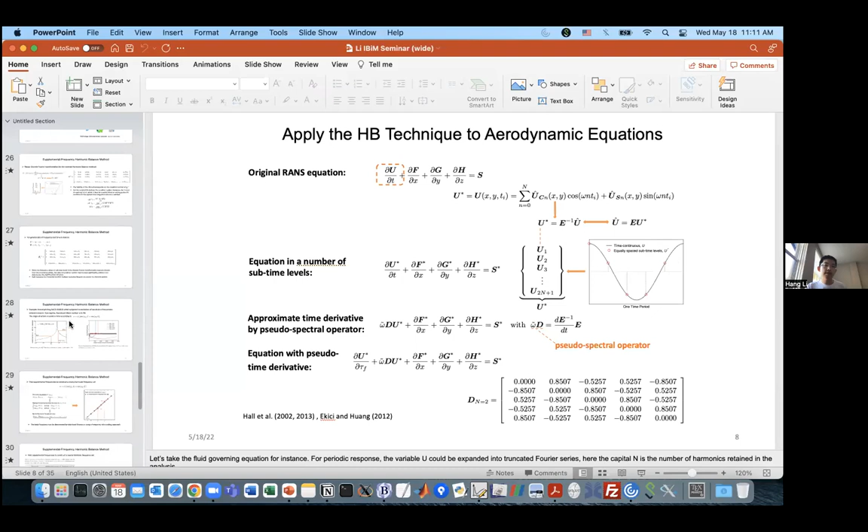Actually, I haven't quantified the accuracy of this solution. But for my test cases here, they match the time-accurate solution very well. There's a little bit of deviation at the very beginning—I think it's because of the initial transient of the time-accurate solution, but overall it matches very well.

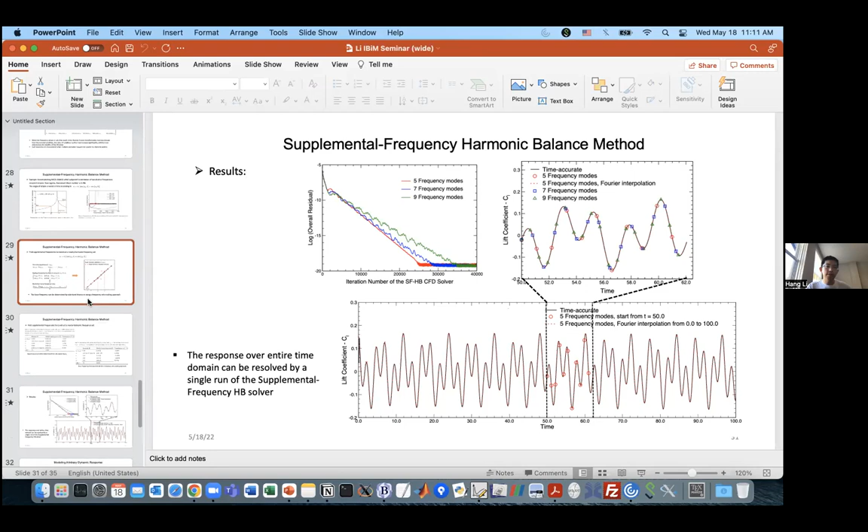You just reminded me—there's one thing I forgot to mention, which is an actual drawback I need to address in future research. For this approach, if I want to construct the near-harmonic frequency set, and the two input frequencies are very close to each other, then this frequency set will need many, many frequencies. If they are not close to each other, I can have just a couple of frequencies.

But if they are close to each other—for example, one frequency is 1 and another is 1.1—then my base frequency will be 0.1, and I'll end up needing 10, 11, or 12 frequencies there. If they are even closer, I need more and more frequencies to construct this near-harmonic frequency set.

For example, here one frequency is 1 and another is 2.6—they are not close, so I can use just 5 frequencies to make it work. So that's another possible drawback I need to study in the future. But overall, this method, this idea, should be good.